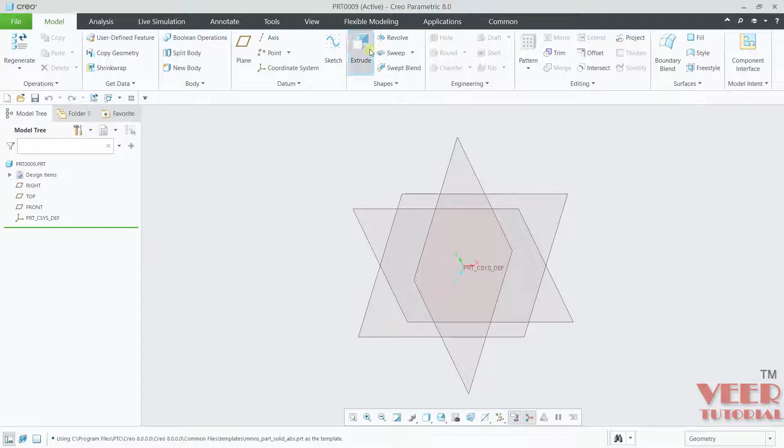From the drawing you can see these values, base part is 105 by 105, and from the front view the depth is 12. So go to Creo, I will go to extrude, select top plane and sketch view. Here I will draw a center rectangle and give it dimensions, 105 by 105. Click OK, and this is 12. Click OK.

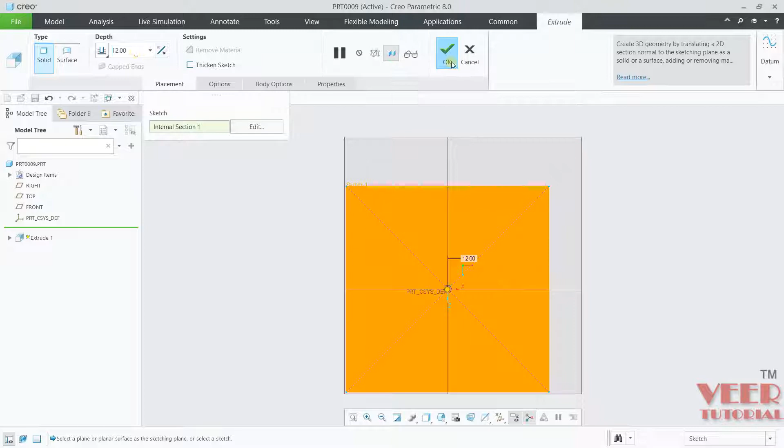After that we need to create the hole. If you go to the drawing once again, we have created 4 holes, and these holes are 20 from the right edge and 20 from the top edge, and these are through holes, so the depth is up to the material. We also have a washer. The diameter of the hole is 10, and for the washer it is 20.

So first let's create all these parts. I will go to Creo. If these are threaded holes, we need to always create the hole using the hole command. I will go to hole.

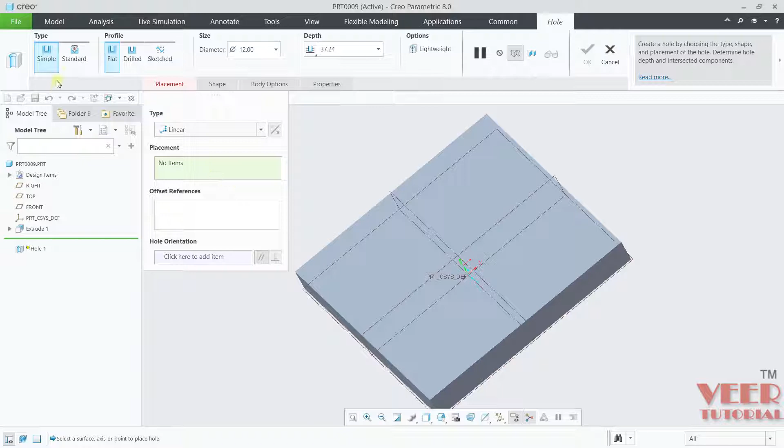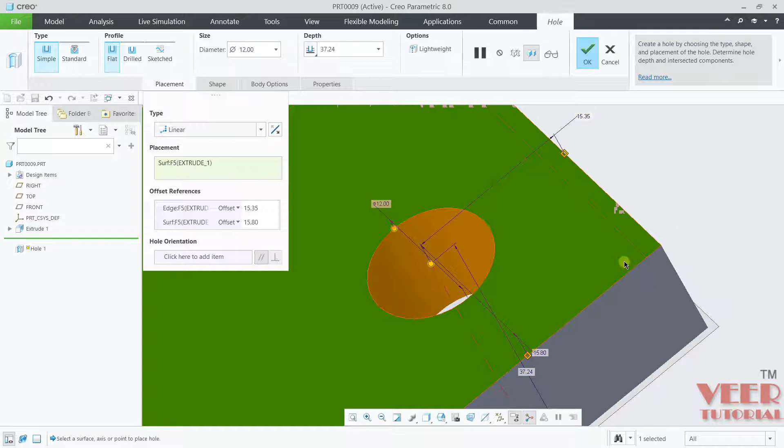This is a simple type of hole, just select the top face. Now for this hole we need to pick up these 2 arrows. Pick the first arrow and take it to the top face or top edge. Similarly, pick the second arrow, hold down the left click and drag the mouse, take it to this edge. Diameter is 10 and offset distance is 20, this is 20 and this is 20, and click OK.

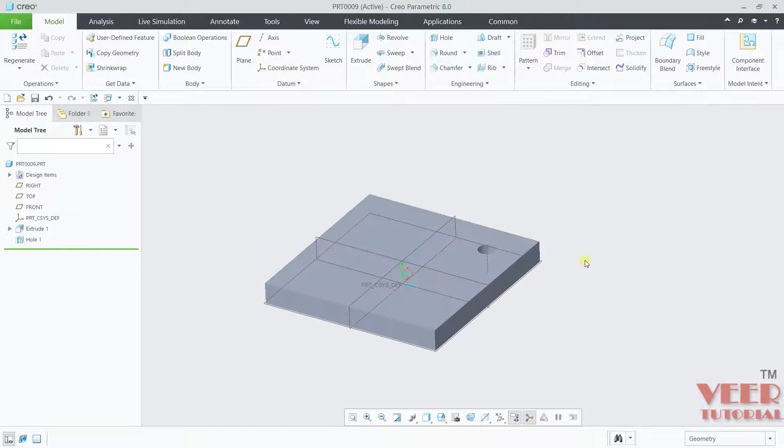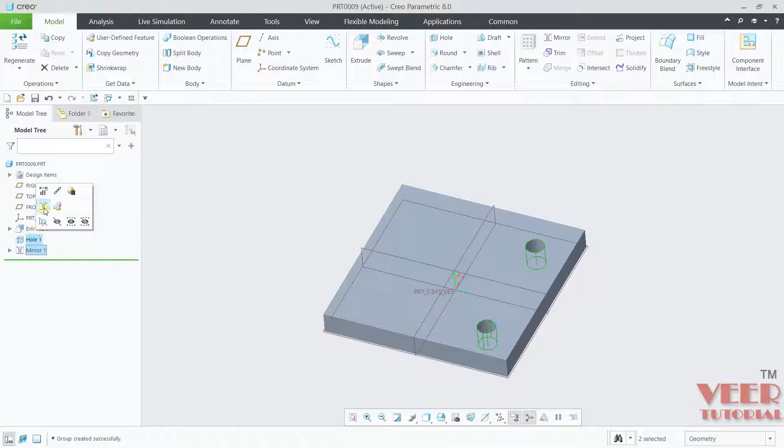Now you can see a hole has been created. We need to create this hole on all 4 sides. So instead of creating the hole once again, I will go to hole, click on this, go to mirror. So mirror this hole with respect to this right plane and click OK. Once again I will select this hole, hold down the control key and select this mirror part, and click on mirror. For the plane this time I will select the front plane and click OK. So in this way you can see we have created the hole.

We can also rename the part. Right click, go to rename, so this is hole 2, like this. Similarly we can also name this part.

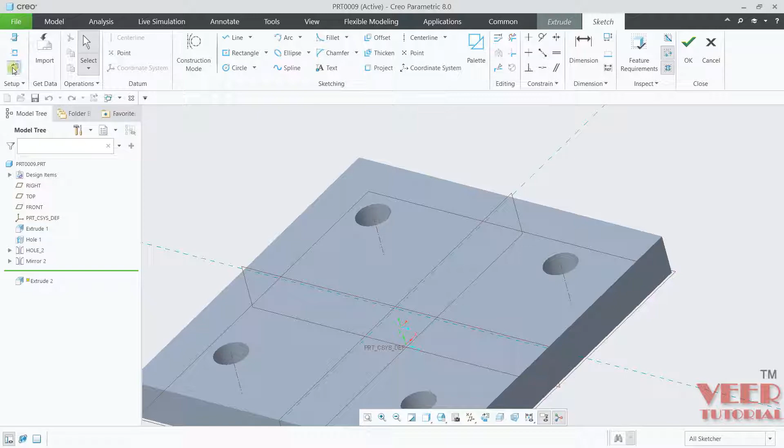After that we need to create the washer. Washer needs to be created with the extrude command. Go to extrude, select this top face and sketch view, and we need to create the circle. So select the circle, give it dimension, this value is 20. Similarly create the circle on all 4 sides like this. When I drag the mouse you can see the circle is turning green, which means these are of equal radius.

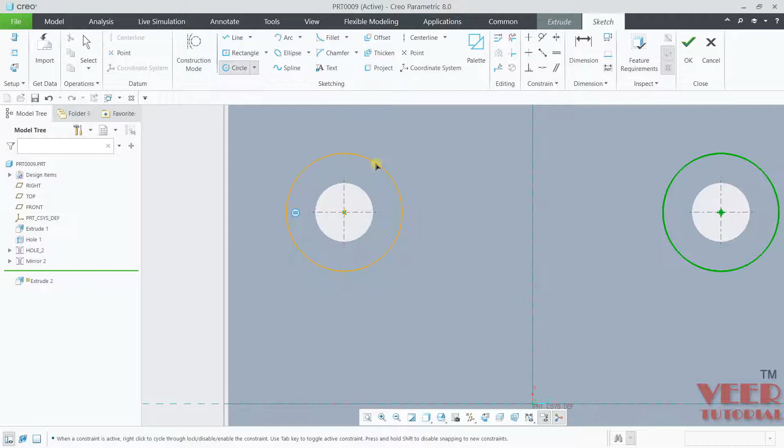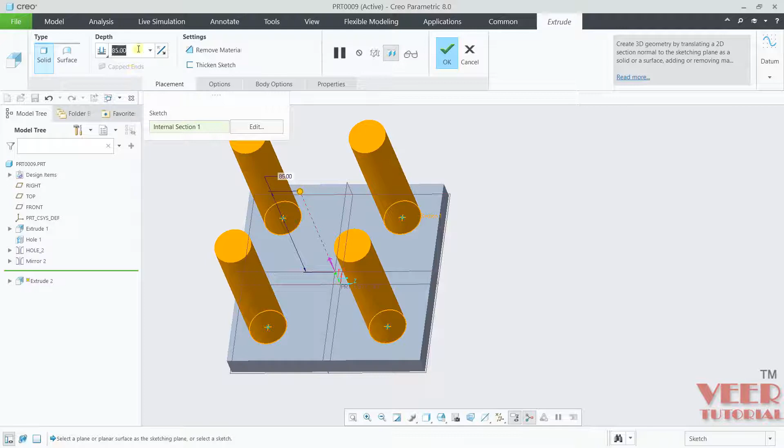Once again I will create the circle, similarly just creating the circle. When it is turning green, click OK. Once again click OK. Now we need to check the depth for the washer. Go to drawing, and you can see from this view the depth of washer is 2. Click OK. Now insert the value 2, reverse the direction and remove the material. Click OK. Now you can see.

I will go to this extrude, right click, rename, this is washer, give it name washer. Here I will select shade with edge view.

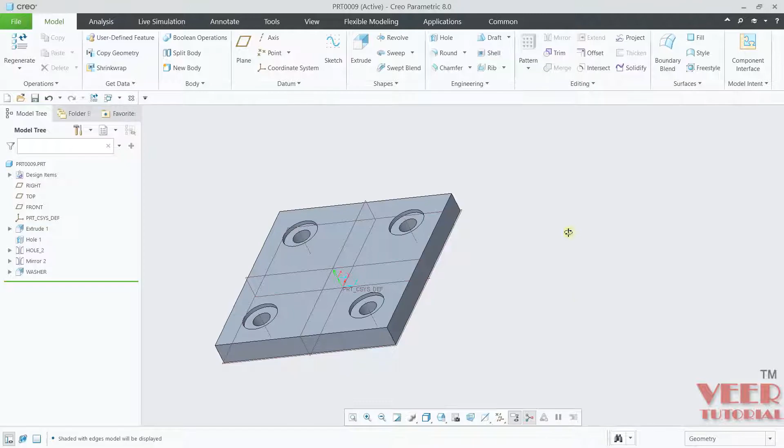After that, if you go to the drawing, we need to create this section. First of all I will create this circular part. From this circular part you can see this diameter is 15, this is 30. We also need height for this, so that height is, okay, the total height is 96. From this view you can see the total height is 96.

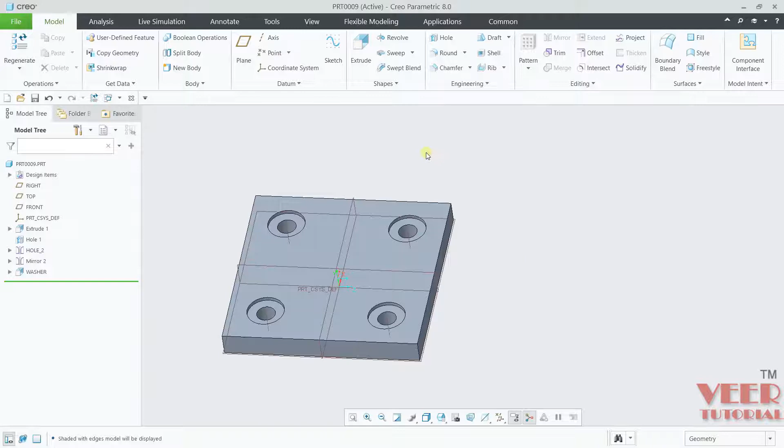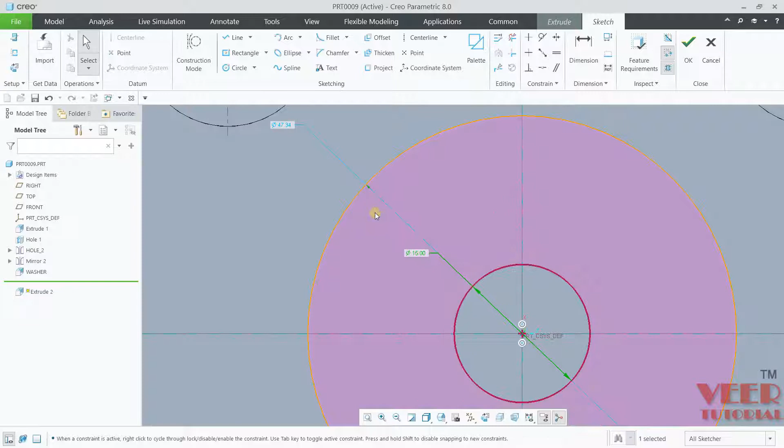I will go to Creo, go to extrude and select this face, sketch view. I will draw two circles, at the center, draw first circle and draw second circle. This circle is of diameter 15, this is of diameter 30. Click OK, and this depth value is 96. Click OK. Now here I will go to drawing once again.

After that we need to create this feature. To create this feature we need dimension for this. This value is 30 and it is offset at a distance of 20, and also the height is 70. To create this feature we need a datum plane, at a height of 20, you can see this height is 20. So I will go to plane and select this right plane as reference, and the offset value is 20. Click OK.

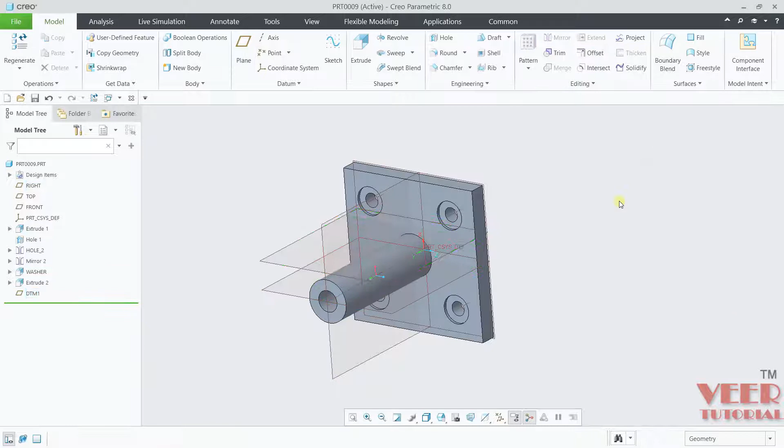Now from this plane I will go to extrude, select this plane we have created and go to file view, then sketch view. From the sketch view I will take some references. I will take reference of this line and this line. Click close.

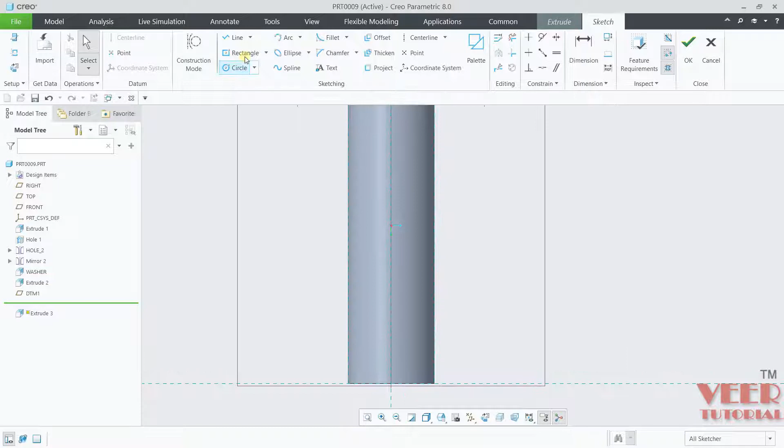From here I will draw a rectangle, a corner rectangle like this. Let's say I will draw a rectangle like this, and this dimension is 30, and this dimension is 70.

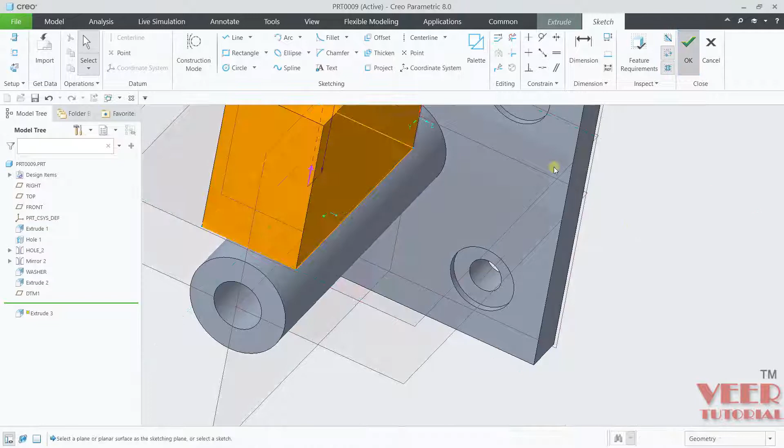Click OK. Now extrude is going upward, but I want it in the downward direction, so change the direction from here. Also for the depth I will select up to reference and select this face as a reference and click OK.

Similar thing we need to do on this face, so here we need to create this side part. You can see the distance from side edge is 20, and this is 20, and the height of this part is 90 we have created, and this smaller one is 70.

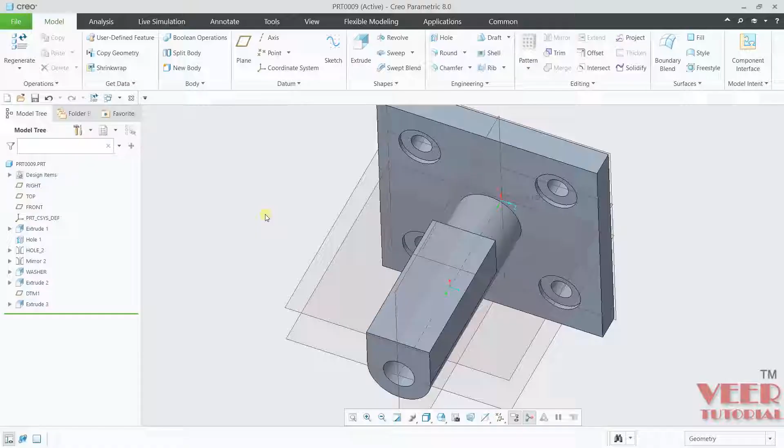I will go to this extrude we have created, go to edit definition, go to sketch once again, sketch edit, and go to sketch view. This length value is 90 here. Click OK, now click OK once again.

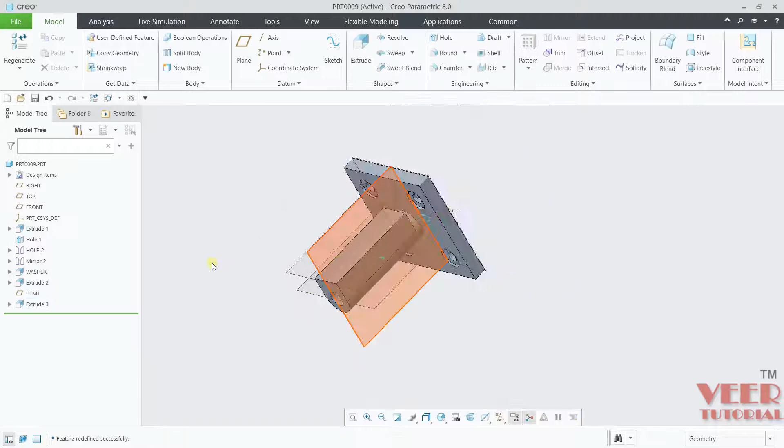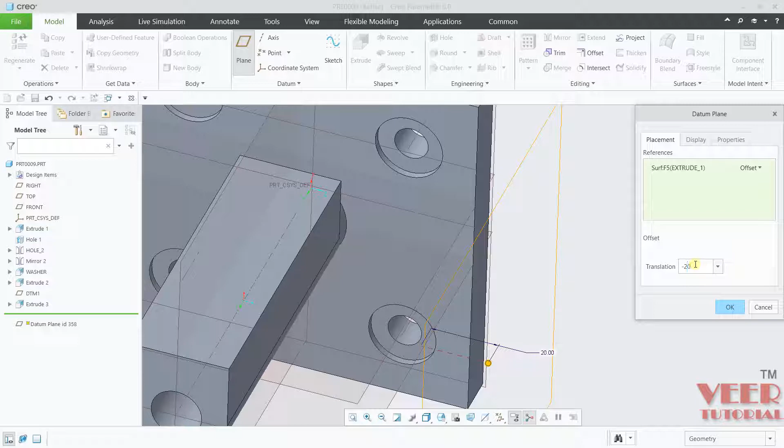I will have to create one more datum plane that is offset from this surface at a distance of 20. So I will go to plane, select this face. This distance is 20, okay, we need to reverse the direction, so this value is negative 20. Insert value negative 20, press enter. Now it is going inward.

Click OK. Now I will go to extrude, select this plane we have created, click on sketch view. Once again we need some references. This value is 20 and this height is 70. I will need some references like this.

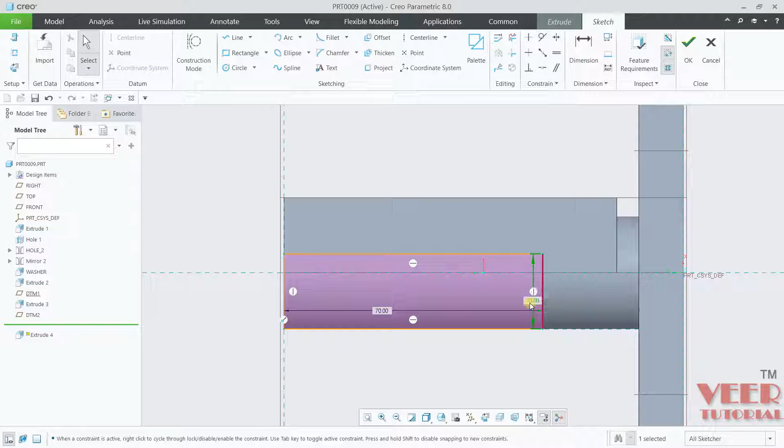Now click on corner rectangle from this edge, draw a rectangle like this. This value is 70 and this value is 20. Click OK. Once again reverse the direction.

Click on this option of up to reference. To the reference I will select this face. I will select this bottom face also. Click OK. Now the solid part is completed.

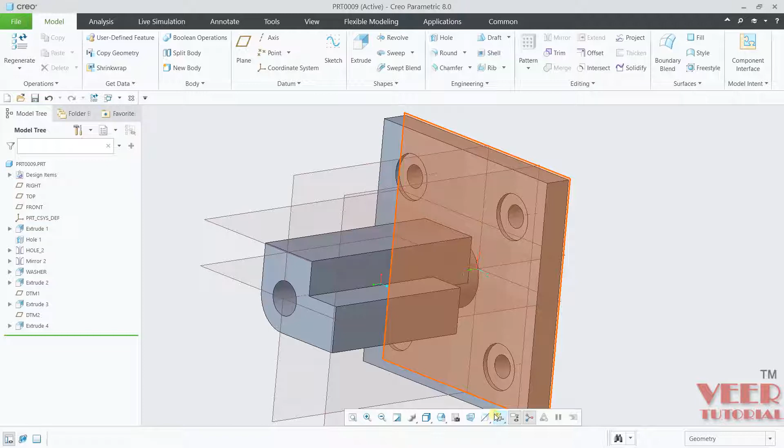We need to create the hole. So these are not threaded holes as you can see, so we can create it using the extrude command. I will go to extrude, select this top face, sketch view.

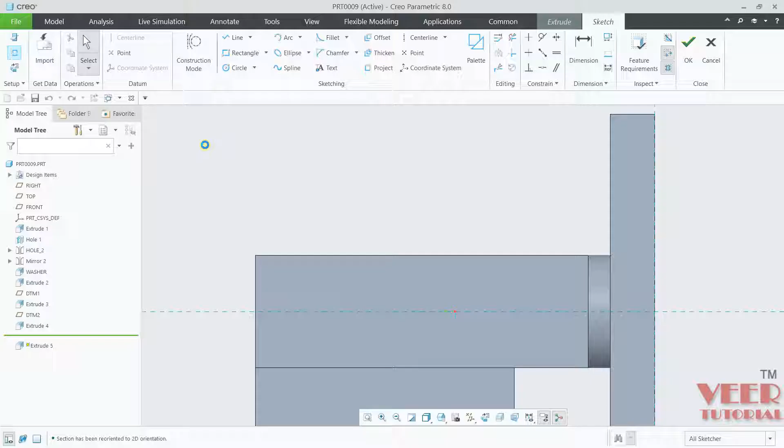Let's find the dimension. We need to find it from this view. So the gap is 30 and 30 and this is 10. Take the edge reference like this. We also need a center reference line. Go to reference line and draw a horizontal line like this.

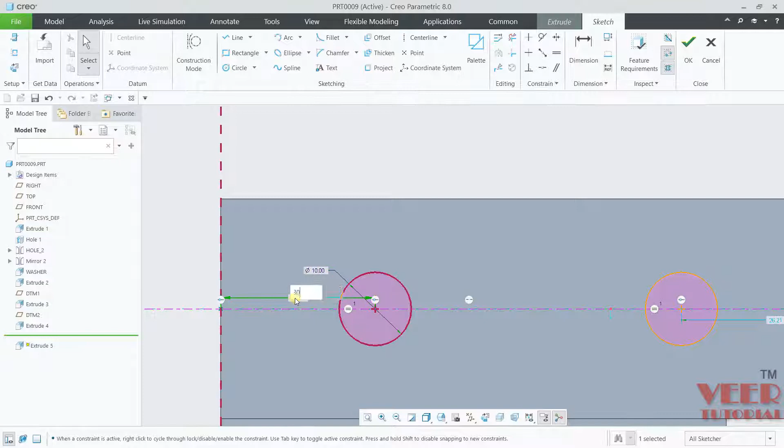Draw two circles of value 10. So this value is 10. This distance is 30 and this distance also 30. Click OK.

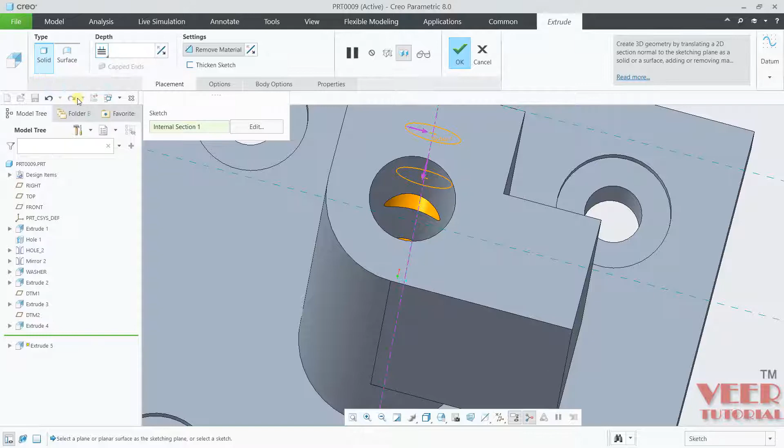Reverse the direction and automatically take up to the reference of this face. Go to reference and click on up to next. With this up to next, it will only take the next surface. Here you can see, click OK.

Similar thing we need to do here. So this distance is 20, 20, and this is 10. Go to extrude once again, select the side face, sketch view.

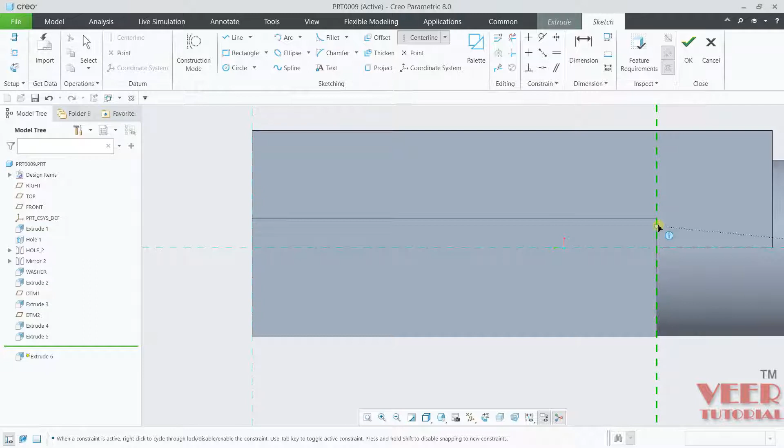Here we need reference, so take the reference of this edge, this edge. We need a center line. I will need to draw a center line. Take the mouse onto this line and let's see if we can get the midpoint.

Okay, we are not getting the midpoint, so I will draw a line like this and specify distance from this edge. This is 10, half of 20. Now draw first circle, draw second circle of equal radius.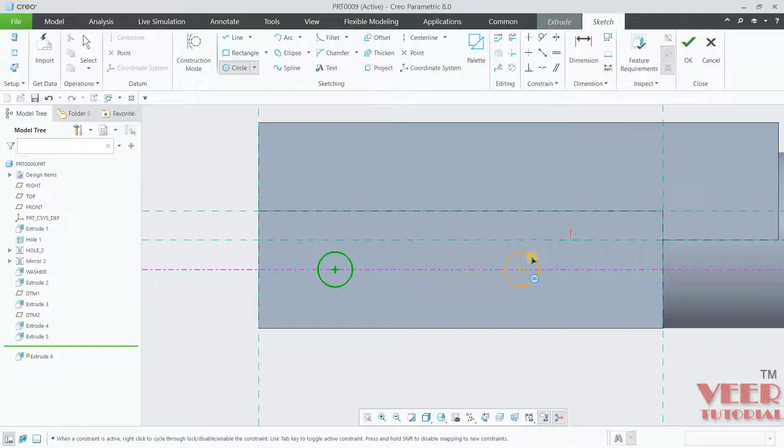This value is 10. This distance is 20, and this distance also 20. Click OK. Now reverse the direction, select up to next. Click OK.

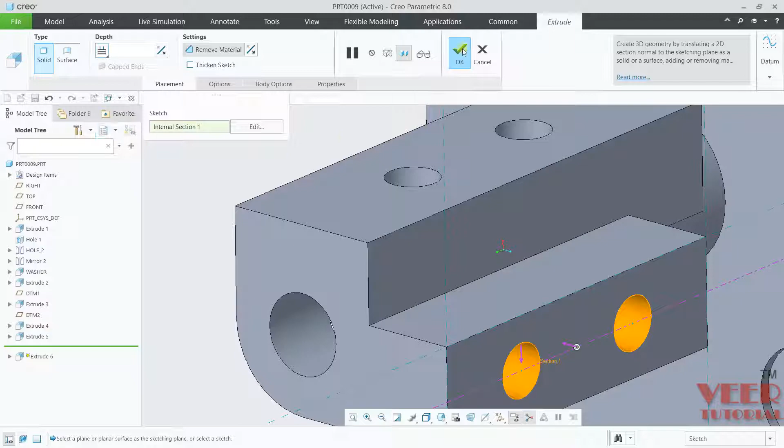In the up to next option, it is also crossing this, so here we need to carefully select the next reference. Let's say I will select up to reference like this. Select these references and click OK.

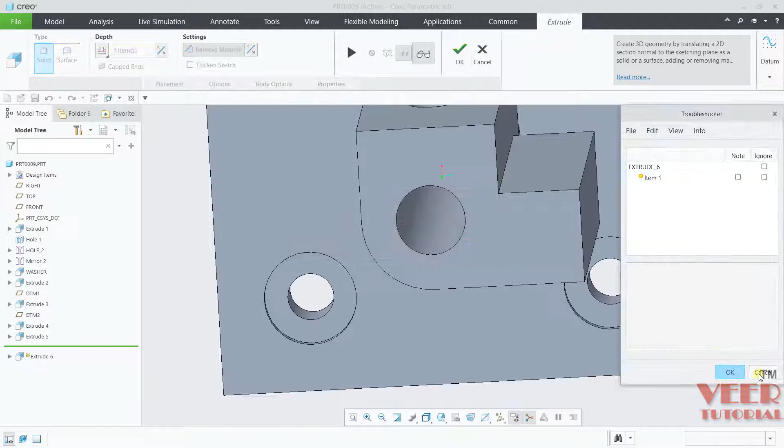Click on cancel once again. Click on resume once again, and when I select through all, or let's say I select up to next, it is going to create the hole like this.

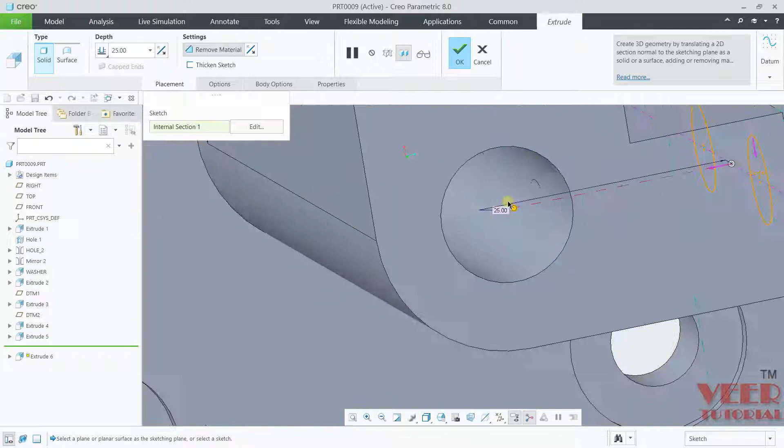So instead we can also specify some variable. Click on variable and pick up the mouse and drag it up to here. Now the hole is completed. Click OK. In this way you can see we have created the part.

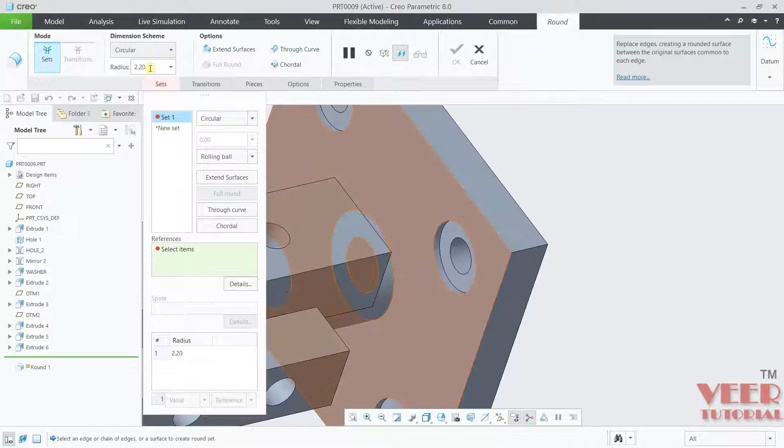In the end we need to create the fillet. You can see we have R10 fillet, so go to round, specify the value 10, select all 4 edges, this edge, select this edge and this edge. Click OK. In this way the part is completed.